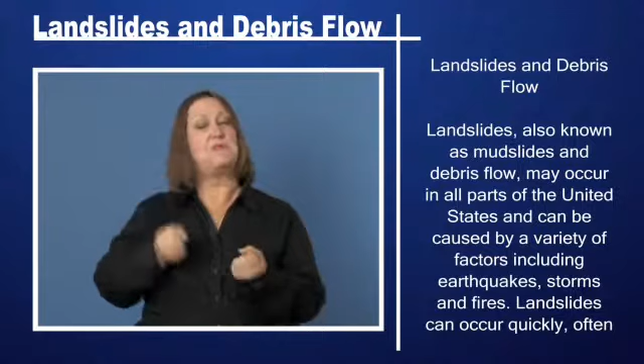Landslides, also known as mudslides and debris flow, may occur in all parts of the United States and can be caused by a variety of factors, including earthquakes, storms, and fires.

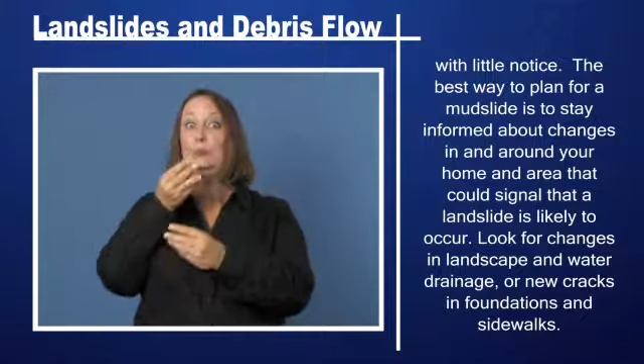Landslides can occur quickly, often with little notice. The best way to plan for a mudslide is to stay informed about changes in and around your home and area that could signal that a landslide is likely to occur. Look for changes in landscape and water drainage, or new cracks in foundations and sidewalks.

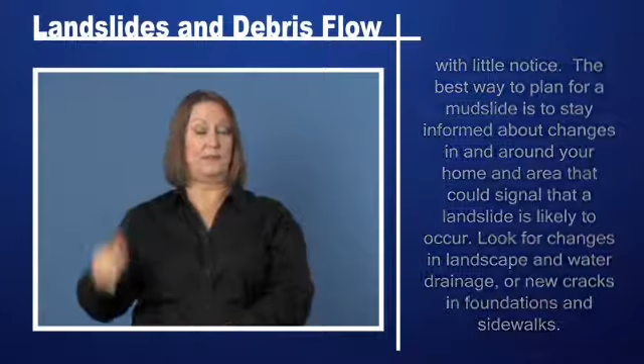Prepare for landslides by following proper land use procedures. Avoid building near steep slopes or along natural erosion valleys. Consult a professional for advice on appropriate preventative measures for your home or business, such as flexible pipe fittings, which can better resist breakage.

Stay informed. Local authorities may not immediately be able to provide information on what is happening and what you should do. However, you should listen to NOAA weather radio, watch TV, listen to the radio, or check the internet often for official news and instructions as they become available.

Landslide and debris flow. Mudslide.

Landslides occur in all U.S. states and territories. In a landslide, masses of rock, earth, or debris move down a slope. Landslides may be small or large, slow or rapid.

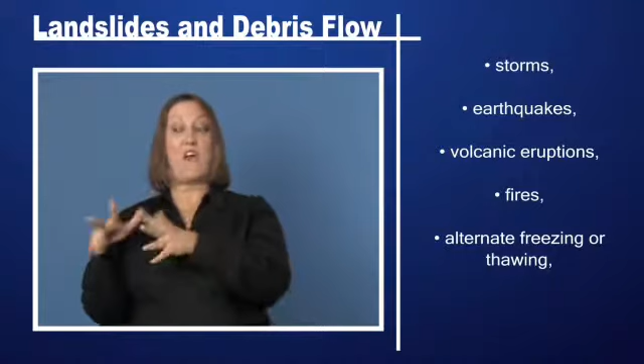They are activated by storms, earthquakes, volcanic eruptions, fires, alternate freezing or thawing, and steepening of slopes by erosion or human modification.

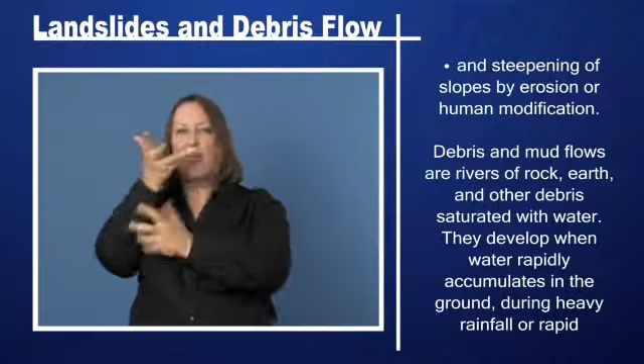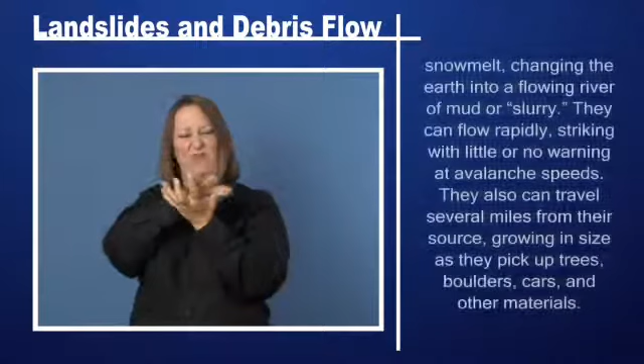Debris and mud flows are rivers of rock, earth, and other debris saturated with water. They develop when water rapidly accumulates in the ground during heavy rainfall or rapid snowmelt, changing the earth into a flowing river of mud or slurry.

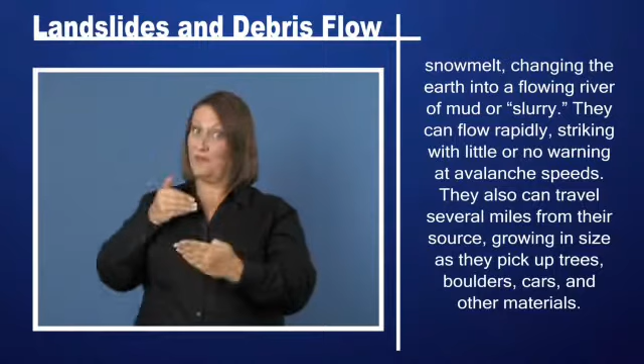They can flow rapidly, striking with little or no warning at avalanche speeds. They also can travel several miles from their source, growing in size as they pick up trees, boulders, cars, and other materials.

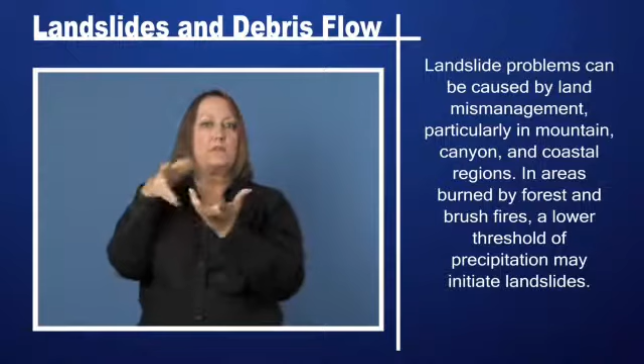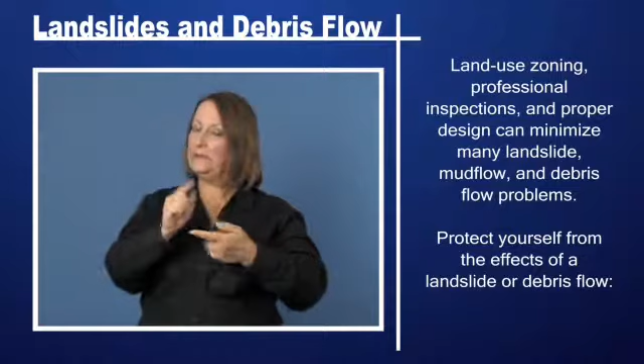Landslide problems can be caused by land mismanagement, particularly in mountain, canyon, and coastal regions. In areas burned by forest and brush fires, a lower threshold of precipitation may initiate landslides. Land use zoning, professional inspections, and proper design can minimize many landslide, mud flow, and debris flow problems.

Protect yourself from the effects of a landslide or debris flow. Do not build near steep slopes, close to mountain edges, near drainage ways, or natural erosion valleys.

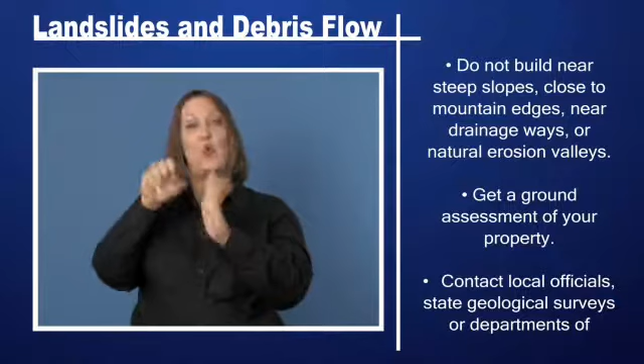Get a ground assessment of your property. Contact local officials, state geological surveys or departments of natural resources, and university departments of geology.

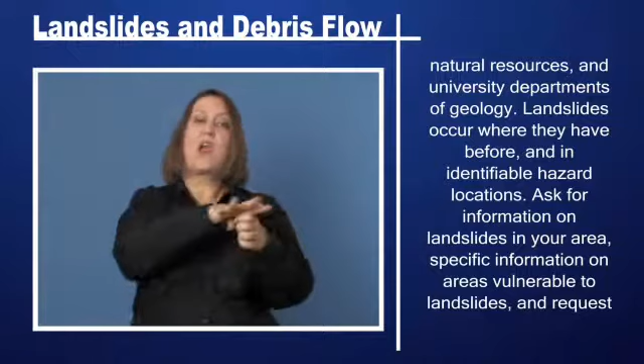Landslides occur where they have before, and in identifiable hazard locations. Ask for information on landslides in your area, specific information on areas vulnerable to landslides, and request a professional referral for a very detailed site analysis of your property and corrective measures you can take if necessary.

If you are at risk from a landslide, talk to your insurance agent. Debris flow may be covered by flood insurance policies from the National Flood Insurance Program, NFIP.

Minimize home hazards. Have flexible pipe fittings installed to avoid gas or water leaks, as flexible fittings are more resistant to breakage. Only the gas company or professionals should install gas fittings.

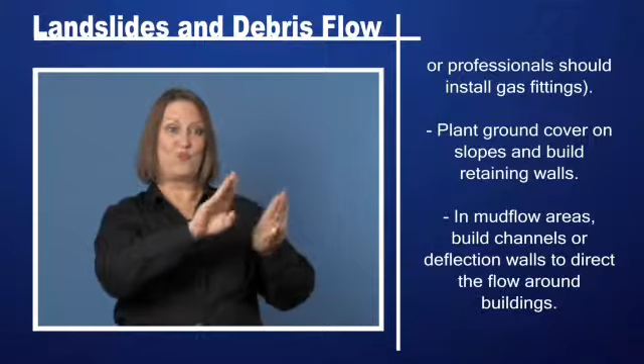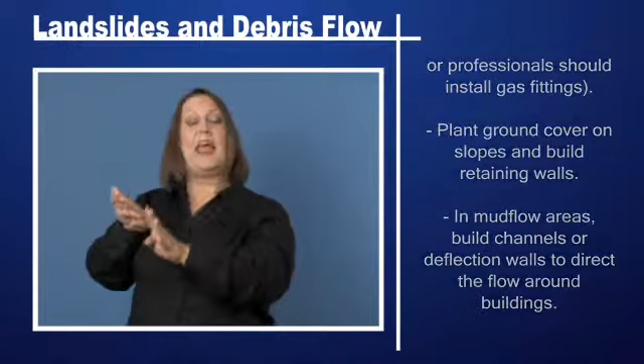Plant ground cover on slopes and build retaining walls. In mudflow areas, build channels or deflection walls to direct the flow around buildings. Remember, if you build walls to divert debris flow and the flow lands on a neighbor's property, you may be liable for damages.

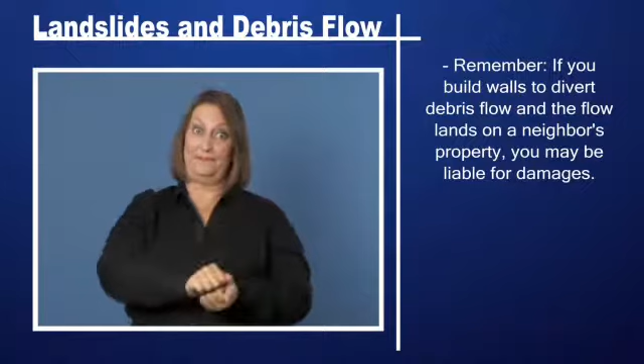Recognize landslide warning signs. Changes occur in your landscape, such as patterns of storm water drainage on slopes, especially the places where runoff water converges. Land movement, small slides, flows, or progressively leaning trees.

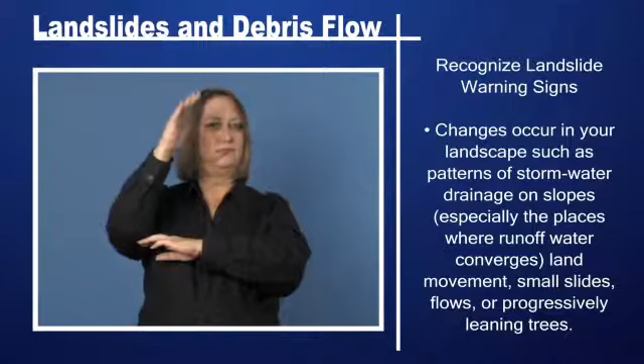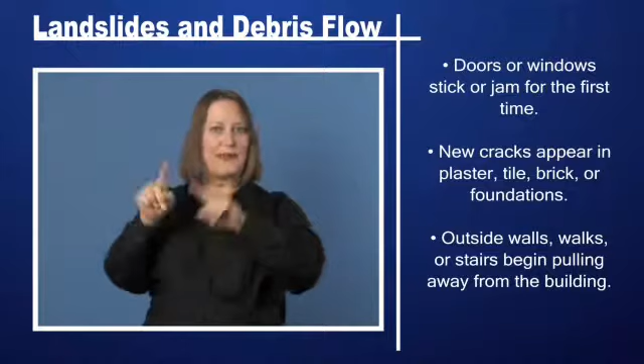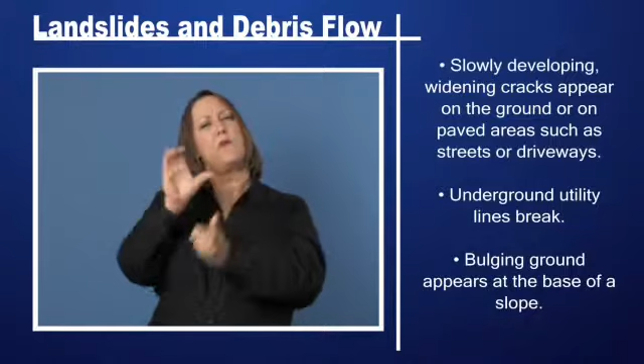Doors or windows stick or jam for the first time. New cracks appear in plaster, tile, brick, or foundations. Outside walls, walks, or stairs begin pulling away from the building. Slowly developing, widening cracks appear on the ground or on paved areas such as streets or driveways.

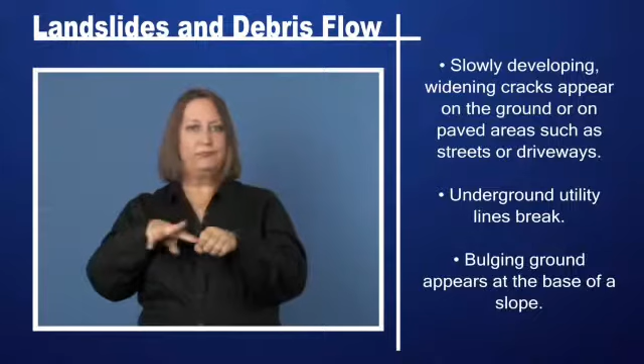Underground utility lines break. Bulging ground appears at the base of a slope. Water breaks through the ground surface in new locations.

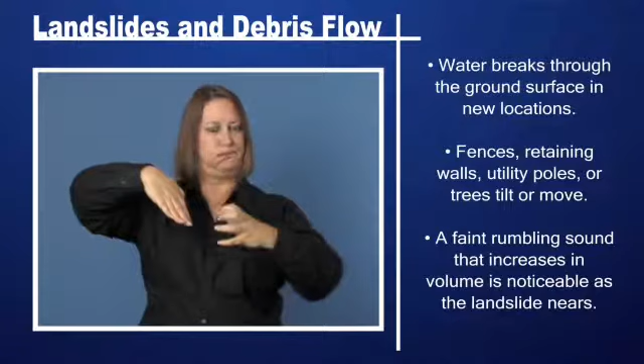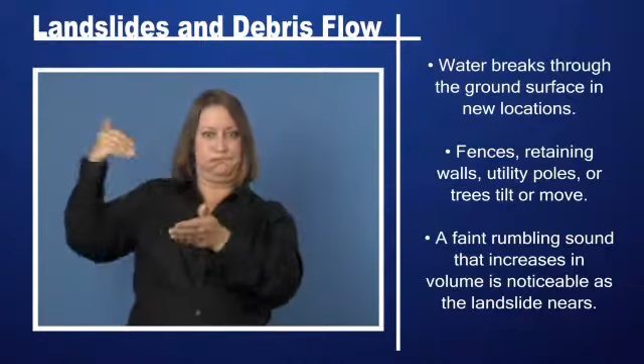Fences, retaining walls, utility poles, or trees tilt or move. A faint rumbling sound that increases in volume is noticeable as the landslide nears. The ground slopes downward in one direction and may begin shifting in that direction under your feet. Unusual sounds, such as trees cracking or boulders knocking together, might indicate moving debris.

Collapsed pavement, mud, fallen rocks, and other indications of possible debris flow can be seen when driving. Embankments along roadsides are particularly susceptible to landslides.

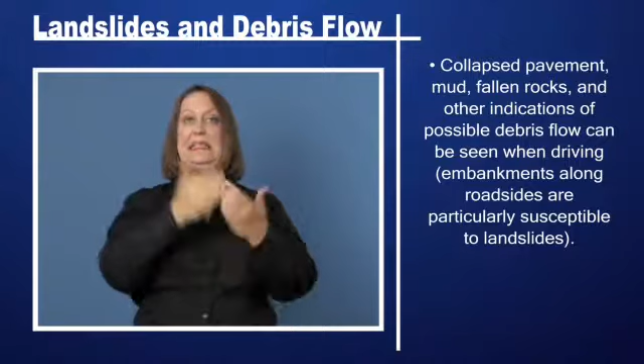During a landslide or debris flow. What you should do if a landslide or debris flow occurs. Stay alert and awake. Many debris flow fatalities occur when people are sleeping.

Listen to a NOAA weather radio or portable battery-powered radio or television for warnings of intense rainfall. Be aware that intense, short bursts of rain may be particularly dangerous, especially after longer periods of heavy rainfall and damp weather. If you are in areas susceptible to landslides and debris flows, consider leaving if it is safe to do so.

Remember that driving during an intense storm can be hazardous. If you remain at home, move to a second story if possible. Staying out of the path of a landslide or debris flow saves lives.

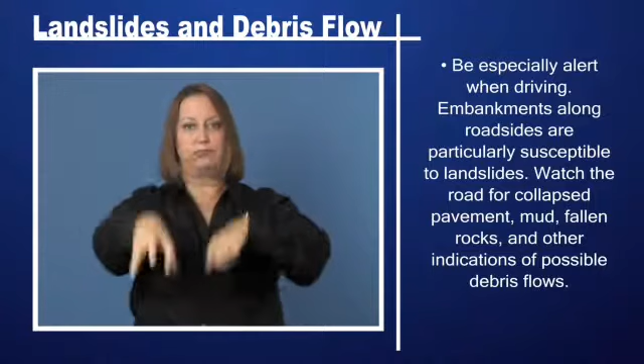Be especially alert when driving. Embankments along roadsides are particularly susceptible to landslides. Watch the road for collapsed pavement, mud, fallen rocks, and other indications of possible debris flows.

What to do if you suspect imminent landslide danger. Contact your local fire, police, or public works department. Local officials are the best persons able to assess potential danger.

Inform affected neighbors. Your neighbors may not be aware of potential hazards. Advising them of a potential threat may help save lives. Help neighbors who may need assistance to evacuate.

Evacuate. Getting out of the path of a landslide or debris flow is your best protection. Curl into a tight ball and protect your head if escape is not possible.

After a landslide or debris flow. Guidelines for the period following a landslide. Stay away from the slide area. There may be danger of additional slides.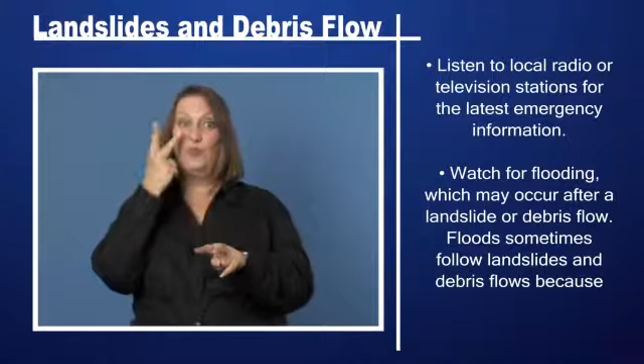Listen to local radio or television stations for the latest emergency information. Watch for flooding, which may occur after a landslide or debris flow. Floods sometimes follow landslides and debris flows because they may both be started by the same event.

Check for injured and trapped persons near the slide without entering the direct slide area. Direct rescuers to their locations.

Help a neighbor who may require special assistance, such as infants, elderly people, and people with disabilities. Elderly people and people with disabilities may require additional assistance. People who care for them or who have large families may need additional assistance in emergency situations.

Look for and report broken utility lines and damaged roadways and railways to appropriate authorities. Reporting potential hazards will get the utilities turned off as quickly as possible, preventing further hazard and injury.

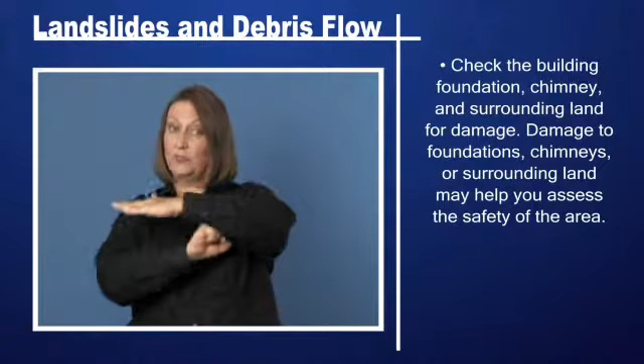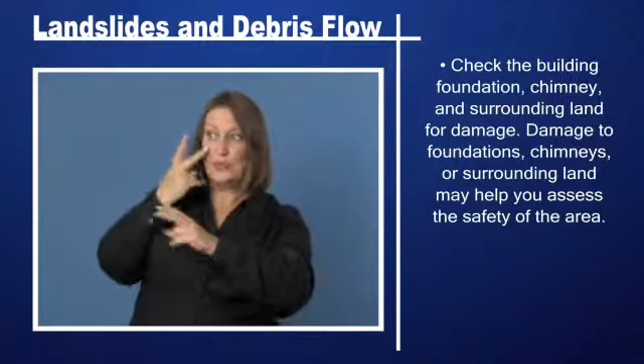Check the building foundation, chimney, and surrounding land for damage. Damage to foundations, chimneys, or surrounding land may help you assess the safety of the area.

Replant damaged ground as soon as possible, since erosion caused by loss of ground cover can lead to flash flooding and additional landslides in the near future.

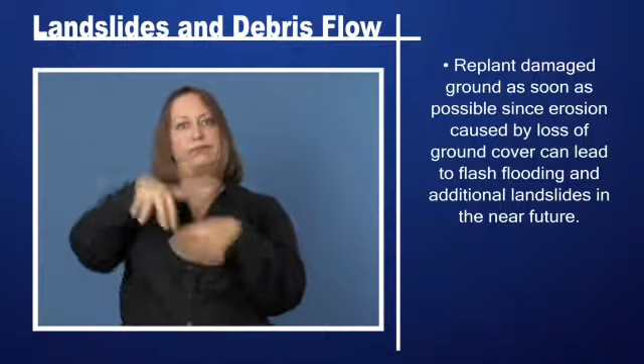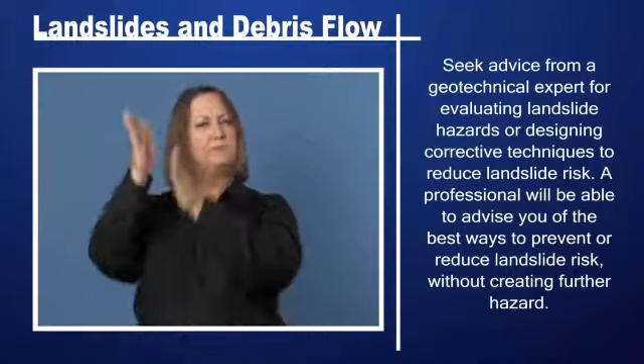Seek advice from a geotechnical expert for evaluating landslide hazards or designing corrective techniques to reduce landslide risk. A professional will be able to advise you of the best ways to prevent or reduce landslide risk without creating further hazard.